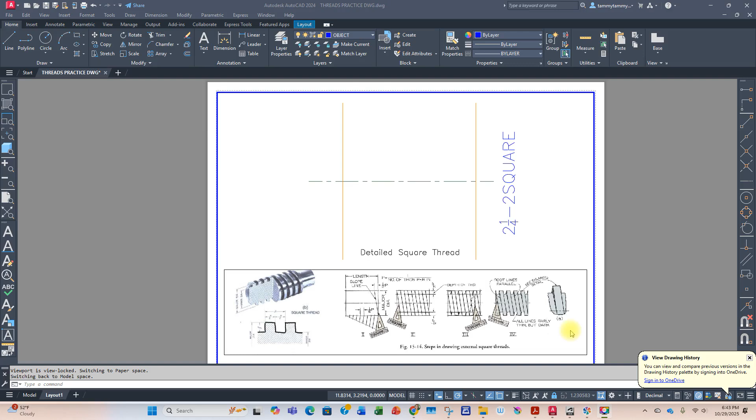Okay, so I've given you this handout sheet in class. This is the cheat sheet, and it's going to go through the steps on how to construct this thread.

This one is a little more detailed than the Sharp V or the Acme, so there's a few more steps involved, but if you follow the steps on the cheat sheet, you should do fine.

So we've got a 2 1/4, 2 square thread. The 2 1/4 is your major diameter, and the 2 square, that's your threads per inch.

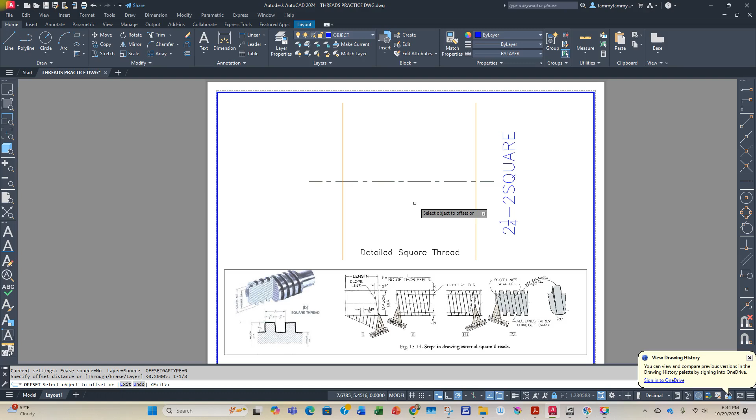So we've got to get the major diameter laid out. Half of 2 1/4 is going to be 1 1/8. So we're going to offset up and down 1 1/8 to get that thread laid out.

So let's trim some things out. And we're going to change some layers. And we're going to make everything the object layer.

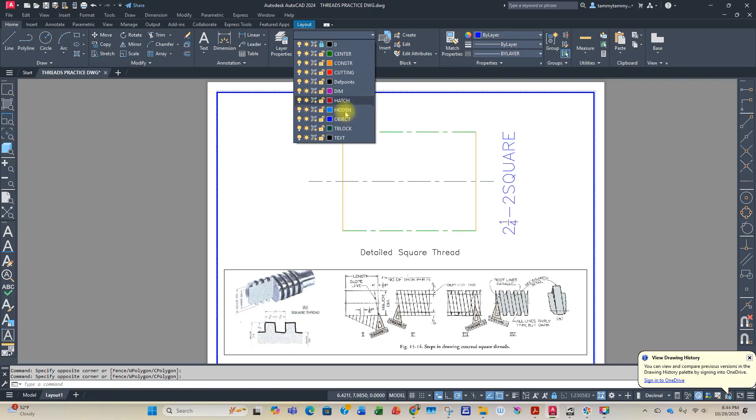Okay, so this is the part that I'm going to thread. 2 1/4 major diameter, and I think the thread's like 3 inches long.

So look at our steps down here. We're going to lay out half P. So we need to lay out half P across this thread.

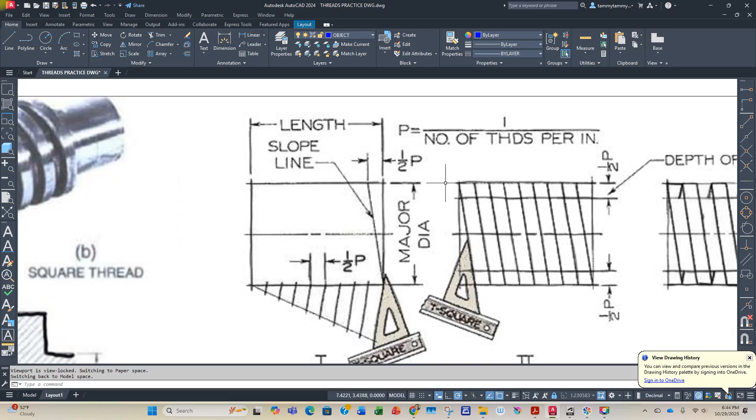So the pitch is 1/2, right? Because it's 1 over the threads per inch.

So we need half of the pitch. So that would be 1/4.

So we're going to offset 1/4 all the way across. So you're just going to take that line, just offset everything all the way across.

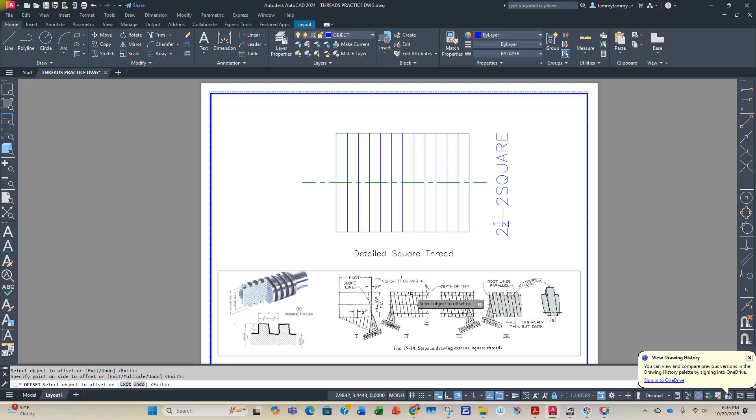Now, if you look at our little cheat sheet down here, it tells us we have to offset up and down half P. So we're going to offset 1/4 up and 1/4 down.

Now, in order to get everything lined up, we can do a couple of things. I like to go ahead and trim out this inside piece and get it out of the way.

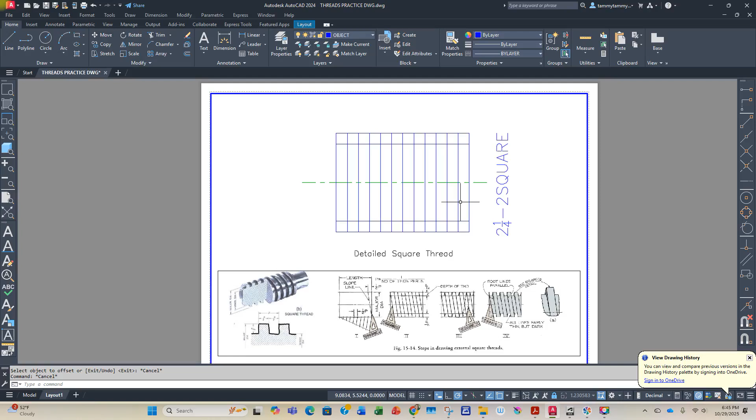I'm going to need these little vertical pieces in order to make this detail of the thread, so I'm going to leave those. At this point, let's just trim out the inside of our offset.

Okay, so now this is what we have. We have our pitch laid out, and we have the half pitch up and down. Now let's connect to get our thread.

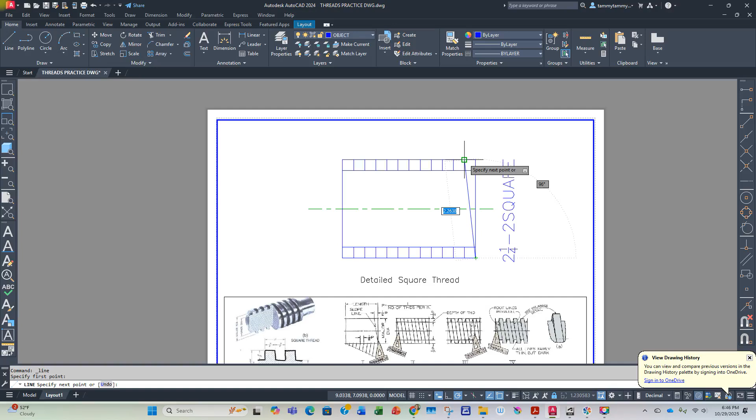So this is a right-handed thread. Rule of thumb, we're going to connect from the bottom right up to the top left. Notice it's angled. You're going to do that all the way across.

So just take those lines. You can either draw them in. I'm using my copy command, and I'm just copying them all the way across.

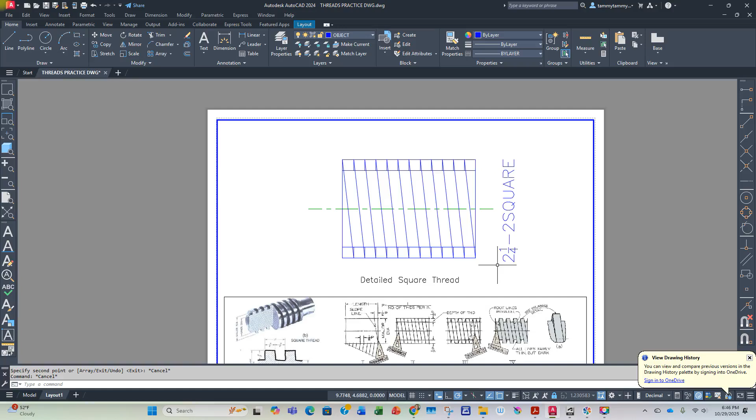Now, you have to think about how this thread is winding around the shaft. We have to show how these threads are moving around that shaft.

So now you make the decision of what is a thread. We're going to trim out across the top every other one.

Leave that line, we'll need it in a minute. Look at that, okay? So now this is a thread.

So corresponding down at the bottom, I'm going to trim out every other one that is not the thread. All right, so now you see it looks like this.

So anything inside this thread, let's get rid of. What I mean is, anything inside this thread, I want to get rid of. See? Just like that. So that makes one complete thread.

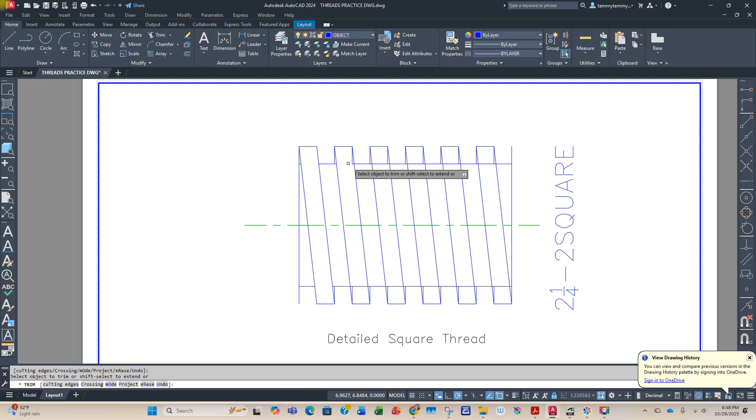So if it's inside my thread, let's get rid of it. Just like that. See? So you're going to do that all the way across.

So anything that is involving the thread, if it is inside, get rid of it, because you're not going to have anything that has to be constructed from thread to thread.

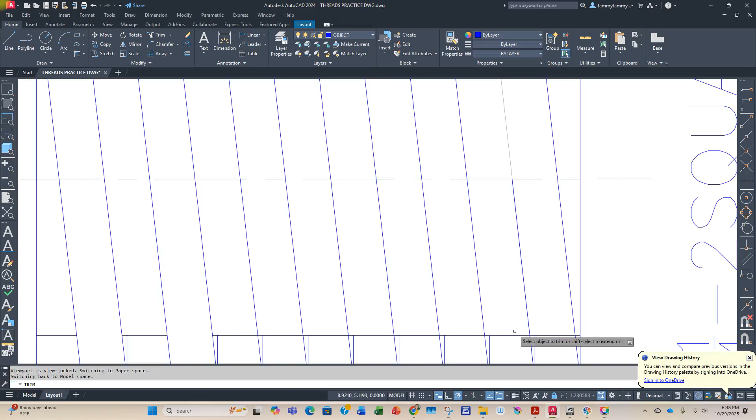So see how nice that looks across the top. Do the same thing at the bottom. Anything in the thread, get rid of it. It's got to go. And I apologize for the little bit of lag in my computer while I'm recording.

Okay, so now this is what we have. The next step we can do is go from this vertical line to the center line, see how that looks?

Vertical line to the center line, vertical, center, see? And you can copy that all the way across.

So you can copy this all the way across.

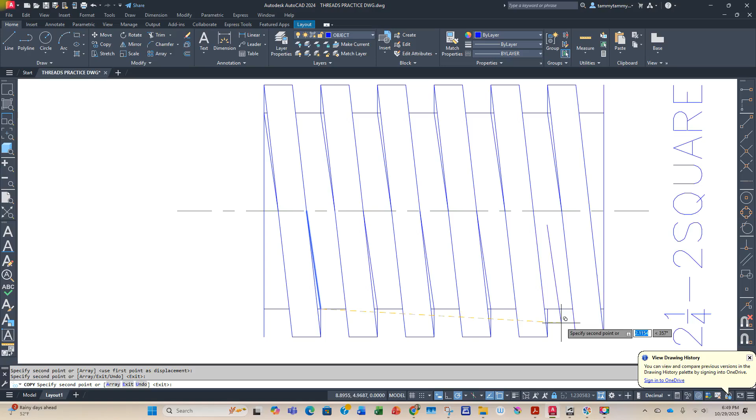And you can copy it across the bottom. Look at that, looks nice.

Now, this is where it gets a little tricky. You have to know which points to line up to, because we have to show this thread coiling around the shaft.

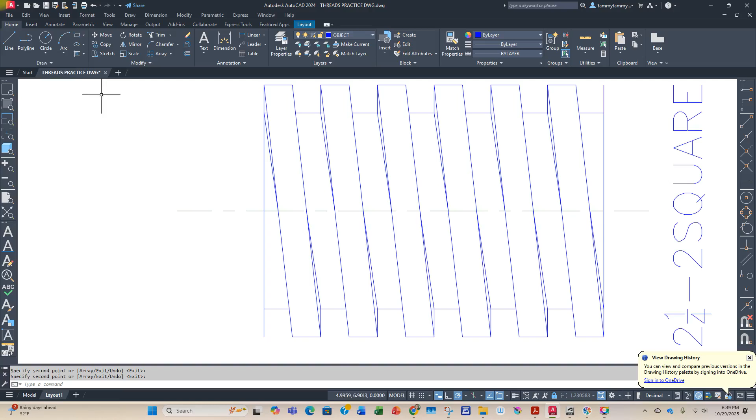So we're going to go to our line command, and we're going to make this thread as if it is moving around the shaft. So what you have to do...

You're going to pick the bottom of the thread. This is the crest of the bottom of the thread, and you're going to pull it to the crest of the next thread. See how I'm connecting? See what that looks like?

We've got to do the next corresponding crest to the top like that. See how that looks?

So what happens, anything inside the thread, right? It's got to go away. So that gets rid of that line, but it gives us our angle on the bottom of the thread here.

Anything inside the thread's got to go away. Look at that. Now it's just a matter of trim, trim. Look how nice that looks.

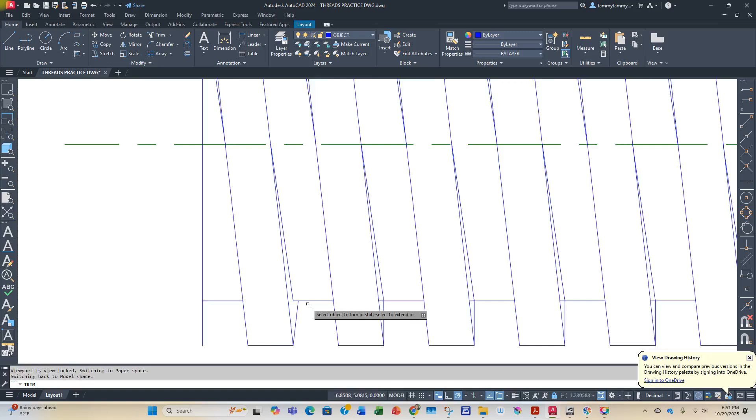Trim, trim. Look at that. So that gives the impression of this going around the shaft of the thread.

So now you can just take this and copy, since you now have the proper angle, this all the way across.

You can copy it down at the bottom as well. Look at that. Get your corresponding points.

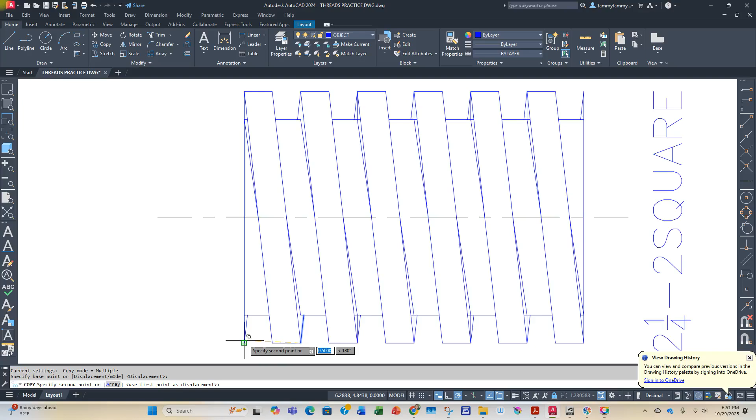Don't forget to do your little end pieces. And then trim it out. Look at that.

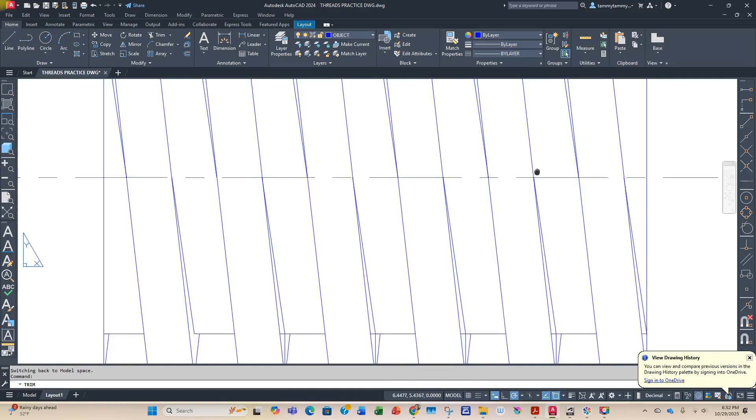And you're going to do the same thing down at the bottom. This little line's going to go.

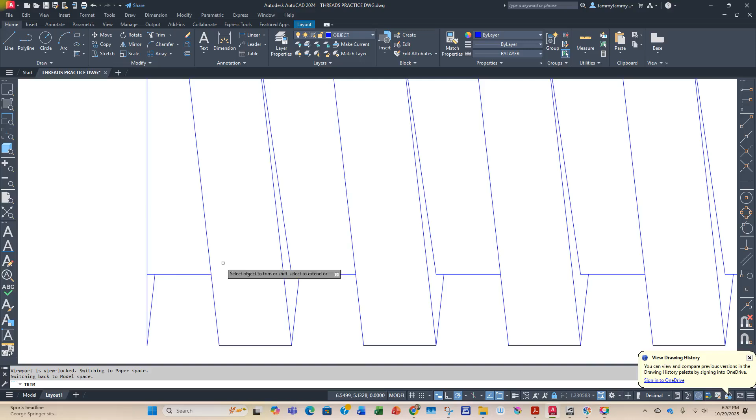And now you have a square thread.

So if you follow your cheat sheet and just keep your points lined up so it looks like it is revolving around that shaft, you've got a really cool looking square thread.